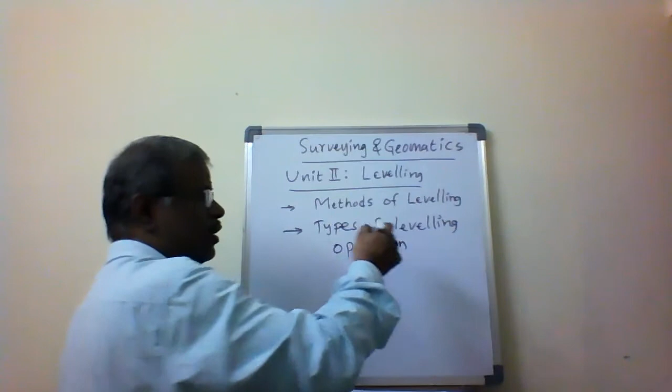Now, after understanding the level and the staff, various types of staves are available. Next is the methods of leveling and the types of leveling operation. In this session, I am going to discuss the various methods of leveling, and the types of leveling operation carried out.

From one point to another, or one end to the other, how the leveling survey is carried out, and the progress of leveling work done by different operations of leveling, is called types of leveling. Methods of leveling refers to the various methods to get the vertical elevation or vertical distance measurement, which we call methods of leveling.

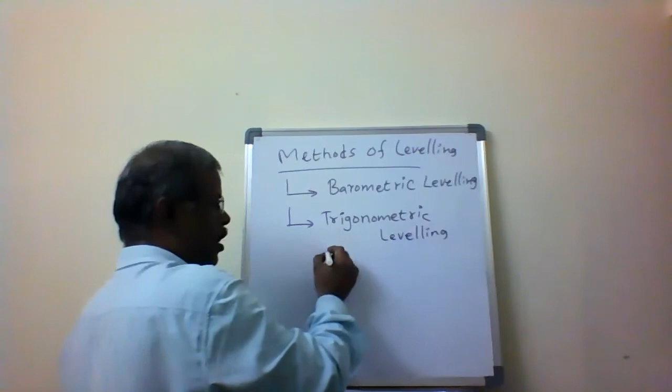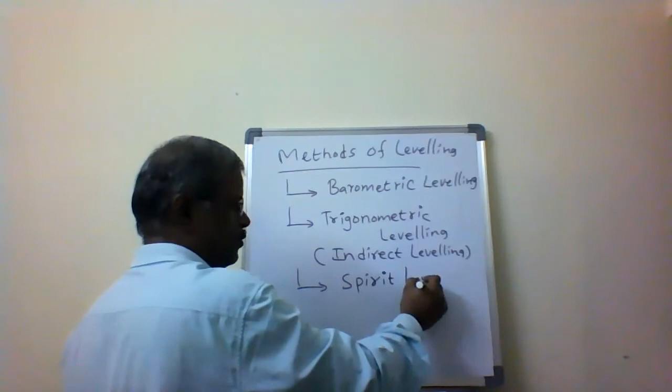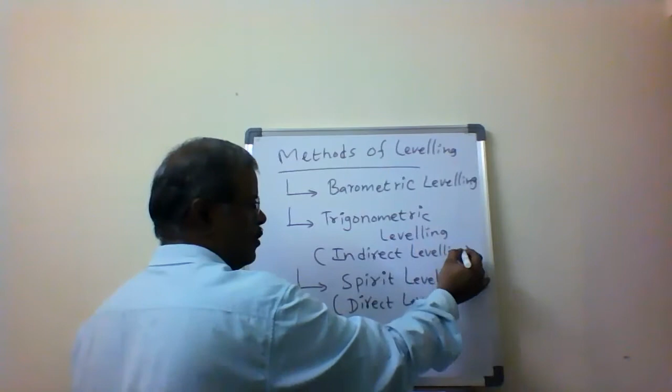In the methods of leveling, three methods are available. The first method is called barometric leveling. The second method is called trigonometric leveling, or indirect leveling. The third method is called spirit leveling, or direct leveling. These are the three methods of leveling available to carry out the leveling survey or leveling work: barometric leveling, trigonometric leveling or indirect leveling, and spirit leveling or direct leveling.

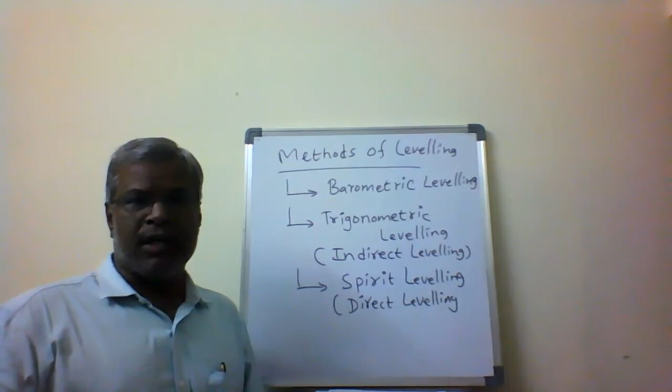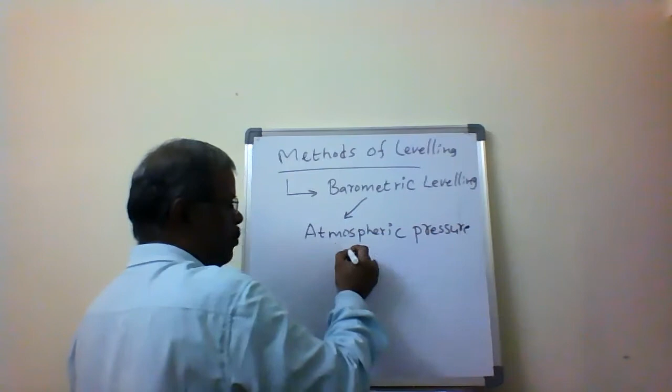So what is meant by barometric leveling, trigonometric or indirect leveling, and spirit or direct leveling? In barometric leveling, we measure the atmospheric pressure and calculate the difference of elevations based on that.

So difference of elevation, or elevations of the points. Here the principle we are going to be using is

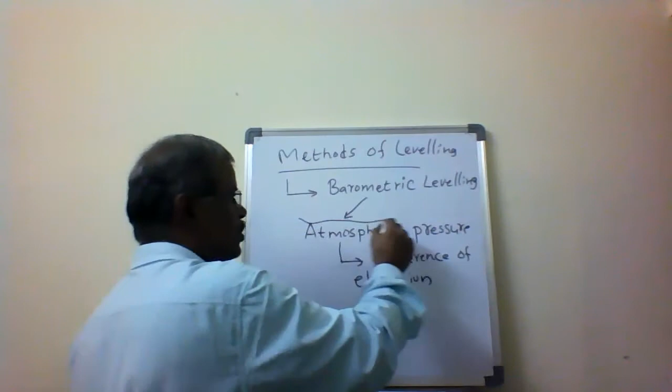atmospheric pressure. That's why we are going to call it barometric pressure and bars. Barometric pressure is going to be measured, the units are going to be called bars. So the barometric pressure is not going to be constant from place to place. So the elevation is going to be measured, so from one point to the other point, the elevation is going to change. The atmospheric pressure is not constant.

So this type of survey is going to be used for reconnaissance survey. It is not going to be suitable to carry out the entire leveling process. That's why it is least preferred while going for leveling survey, because atmospheric pressure is not constant. It is going to change from place to place and from point to point. So these abrupt changes will be there in the atmospheric pressure.

So based on the atmospheric pressure only, we are going to be doing the leveling. We call it barometric leveling. So that's the difference of elevation we are going to measure. So with barometric leveling, the changes will be more, or abrupt changes will be there.

It is going to be suitable for preliminary or reconnaissance survey, only for small data we are going to get for the reconnaissance survey, or important information we want related to the place or location. So in that circumstance, we are going to use barometric leveling.

And if you are going for extensive surveys, we are going to preferably use spirit leveling, or direct leveling. So this is about barometric leveling.

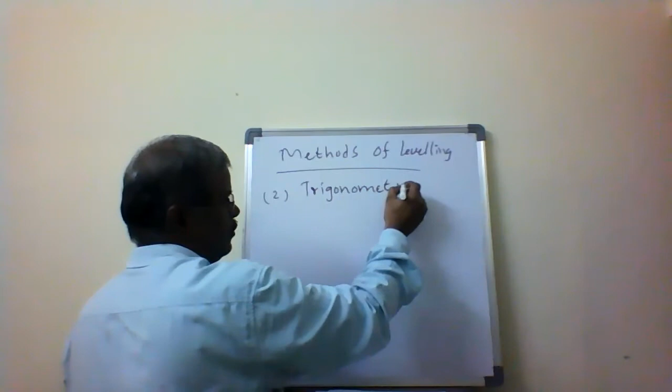So next, the second method in the methods of leveling is trigonometric leveling. So the second method is going to be classified as trigonometric leveling, or this is going to be called indirect leveling.

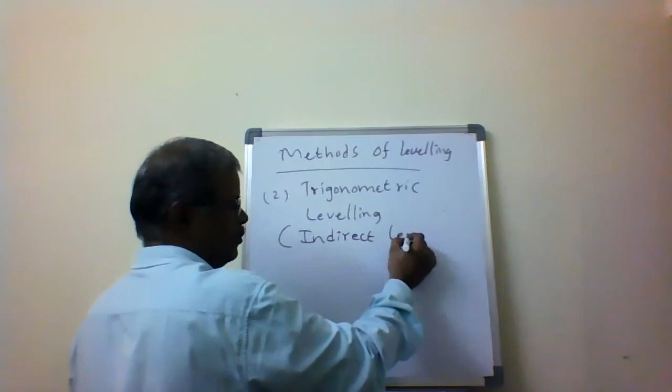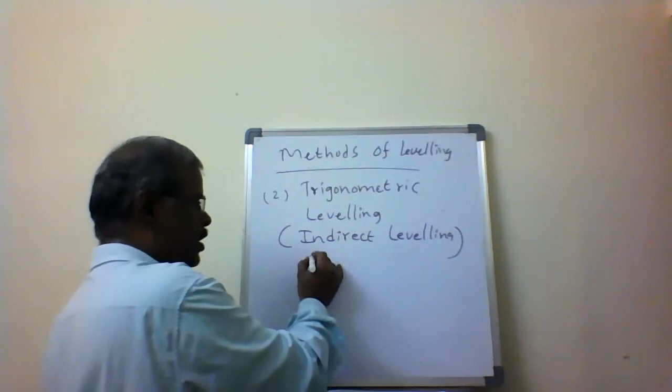So here the term itself gives you the meaning that trigonometry, the trigonometrical relations, we are going to be using while carrying out the leveling work or leveling survey. That's why we call it trigonometric leveling or indirect leveling. So what is the trigonometry we are going to be using here? We call it in terms of heights and distances.

Because the objective of leveling is that we are measuring the vertical distance, vertical height, or the elevation. So that is what we call height. And in addition to that, distance also.

So I want to get two measurements that will be given by angular measurements. If I want to measure vertical height, I need to get the angle, otherwise without the angular measurement it will be very difficult to measure or find out the height. So that's why distance, the linear measurement, is required with respect to the height.

So the one more additional requirement is going to be called angular measurements. That's why we call it indirect leveling. This is not the direct leveling process. So it will be a combination of linear measurement as well as angular measurement required.

I want to get the height or elevation, the vertical distance, vertical height, or elevation. It is going to be a combination of angular measurement and distance measurement. So with only vertical measurements in the leveling instrument, the objective of leveling is to find out the vertical height or the elevation.

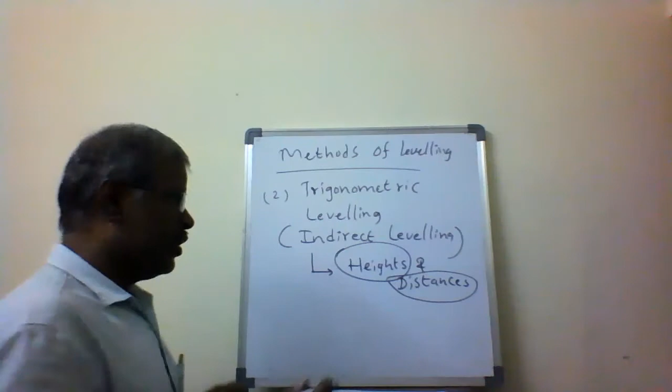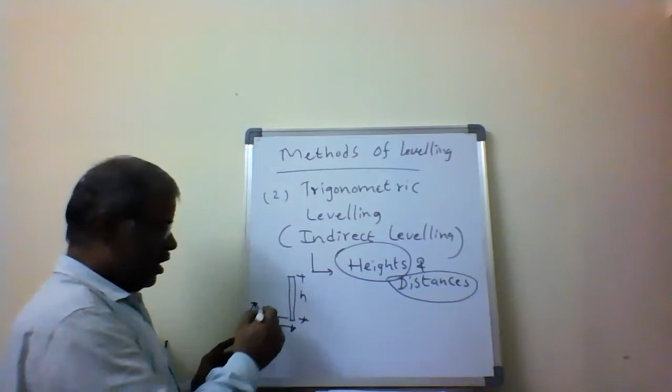For that, we require angular measurement as well as distance measurement, linear and angular. Combination of these gives us the height. So that's why it's called indirect leveling. I want to find out the height of this tower from the instrument station. So first I have to measure the distance, and then if I know the angle with respect to the horizontal, I can find out the height of elevation.

So height is measured with respect to angle and distance. Our objective in leveling is to find out the height, elevation, or vertical distance. For that, I use angular measurement as well as distance measurement, with the help of the angle and distance, applying trigonometrical principles, we calculate the height.

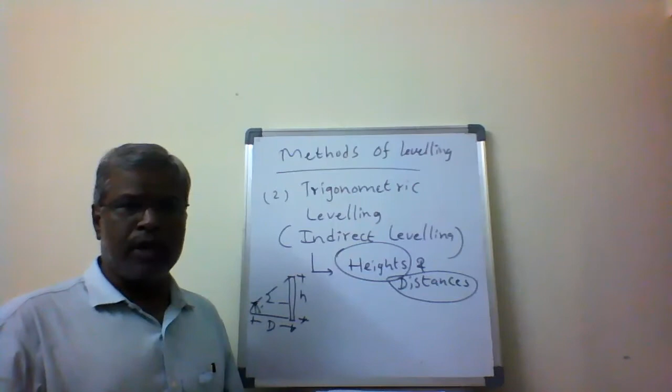So due to this, it is called the indirect method of leveling, or indirect leveling. Indirect leveling is called trigonometrical leveling. We use angular and distance measurement to estimate the vertical height or vertical distance of elevations.

Next, the last method is called spirit leveling, or direct leveling. We use the term spirit because the bubble contains mercury, that's why we call it spirit leveling.

The leveling head has a bubble, which we have to bring to the center so that the instrument is properly leveled. The dumpy level, Y level, tilting level, or automatic level — any leveling instrument has to be properly leveled using the spirit, which contains mercury, and this is called the bubble.

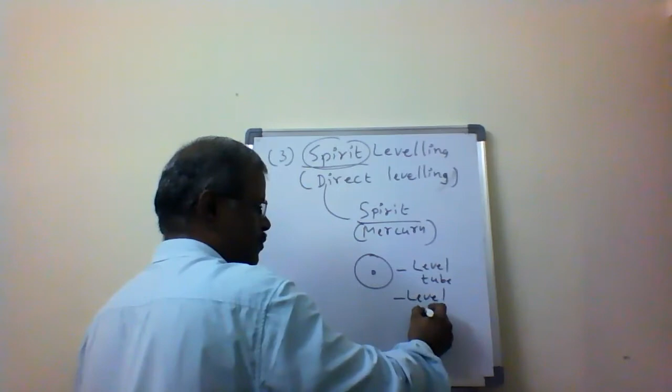This is called the level tube or level bubble. The level tube consists of the level bubble attached to the leveling head, such that the instrument is properly leveled. We have to adjust it so that the level bubble comes to the center by using the foot screws.

This is where we already discussed the temporary adjustments using the 3 foot screws. We must make sure the bubble comes to the center, then the instrument is properly leveled and the measurements taken will be correct. If the bubble is not centered and we take measurements, those will not be accurate — they will be erroneous.

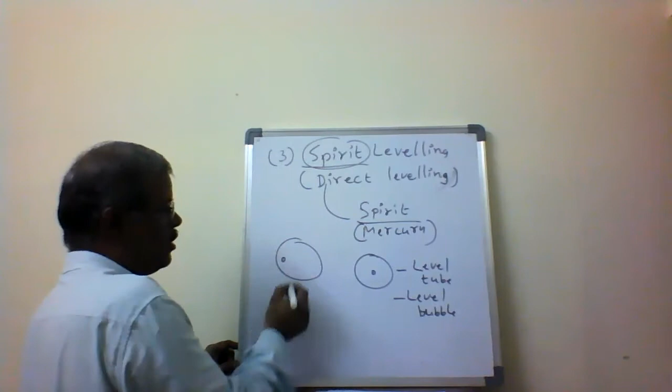So if the bubble is positioned like this, it's wrong. But it always has to come to the center of the level tube or level bubble in the circle, then the instrument is properly leveled. That's why we call it spirit leveling, or direct leveling.

Then we take the scale reading using the staff, where the crosshairs bisect the vertical scale or staff, and we take the reading. This is called the staff reading. The staff reading is added to the known elevation, and we can get the height of the elevation.

That's what we call the reduced level, where the level is reduced with respect to the known elevation of the datum line, or datum surface. So what we calculate is called the reduced level or elevation. That's why spirit leveling is also called direct leveling.

Directly we will take the vertical distance or vertical measurements with the help of a leveling instrument. The leveling instrument is controlled by the level tube or level bubble. In the level bubble, we use mercury or spirit, that's why it's called a spirit level. Always the base is the level bubble or level tube.

Once your level bubble is centered, the instrument is properly leveled. Readings taken by the leveling instrument are then correct, giving you the vertical distance, height, or elevation measurement.

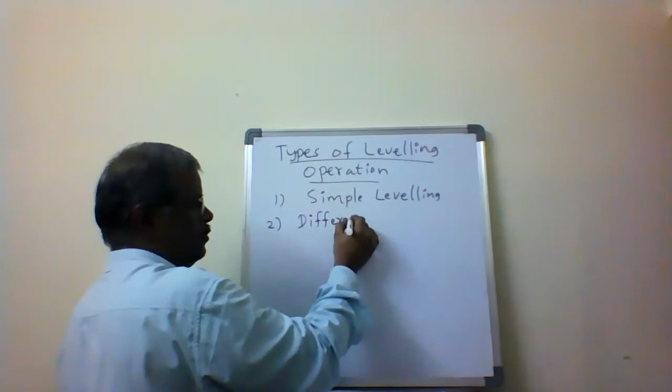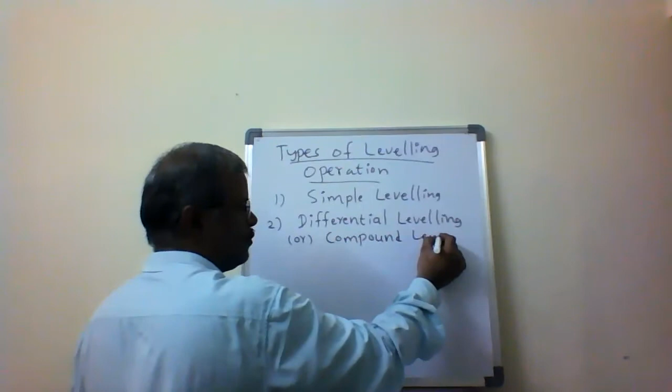The second one is differential leveling, or compound leveling, or continuous leveling.

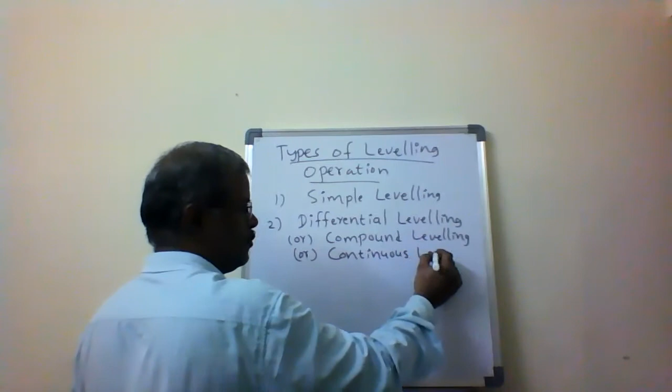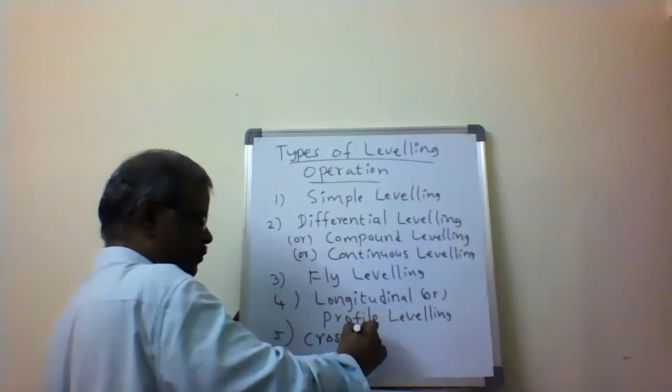The third one is called fly leveling. The fourth one is longitudinal or profile leveling. The fifth one is called cross-sectional leveling. The sixth one is called check leveling.

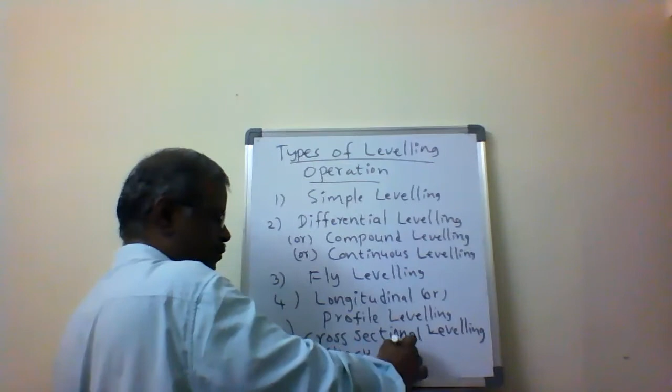So these are the six types of leveling operation. Depending upon the situation or circumstance, we use these to carry out the progress of the work. First is simple leveling, second is differential leveling or compound leveling or continuous leveling, third is fly leveling, fourth is longitudinal profile leveling, fifth is cross-sectional leveling, and sixth is check leveling.

These are called leveling operations, used to find the difference of elevation between points. Our main objective is to calculate the difference of elevation, or to find out the height of the object with respect to the datum line or datum surface. That is our objective.

So the first objective is estimating the height or elevation of the point or object with respect to the given datum. The second is the difference of elevation between two points. These are the two things we find out using the leveling operation, or leveling survey.

So what is the simple leveling operation? What is differential leveling or continuous leveling operation? What is fly leveling? Longitudinal or profile leveling, cross-section leveling, and check leveling. The first one is called simple leveling.

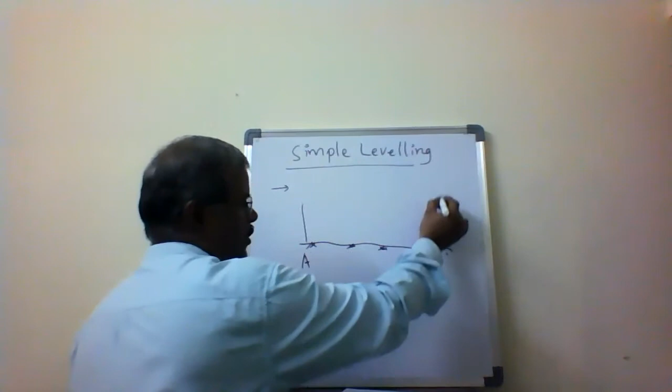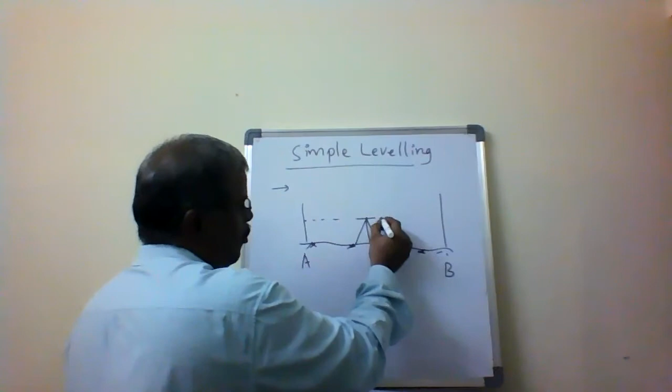So how do we carry this out? This is the ground. This is point A, and this is point B. The leveling instrument is going to be set up midway between point A and point B, because the distance between A and B is very small. That's why we select the location of the instrument midway between A and B. Then I'm going to take the readings on A and B.

After calculating that with respect to the benchmark, we are able to calculate the elevation of point A and the elevation of point B. Once you know the elevation of point A and point B, we can compare whether A is in a higher position or B is in a higher position. That is what we call difference of elevation. We calculate this once we know the elevations of point A and point B, the heights of the points. This process is called simple leveling.

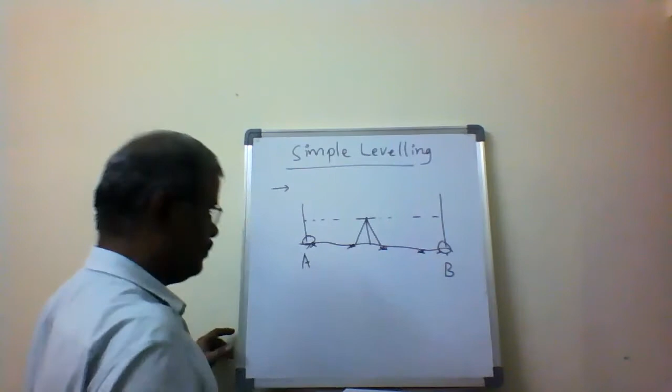So next is the second method, called differential leveling or continuous leveling, also known as compound leveling.

Here also the objective is the same: we find the elevation of the points first, and second, the difference of elevations from point A to point B. At consecutive points, we are able to find the difference of elevation. Here A and B are very far apart, so this is for longer distances. Sometimes while taking the leveling survey, an obstacle may come across.

So then shifting of the instrument will take place. We shift the instrument, go beyond the obstacle, take out measurements, and find the elevations of all the points. In such cases, we use continuous leveling or compound leveling, whereas in the previous case it was simple leveling.

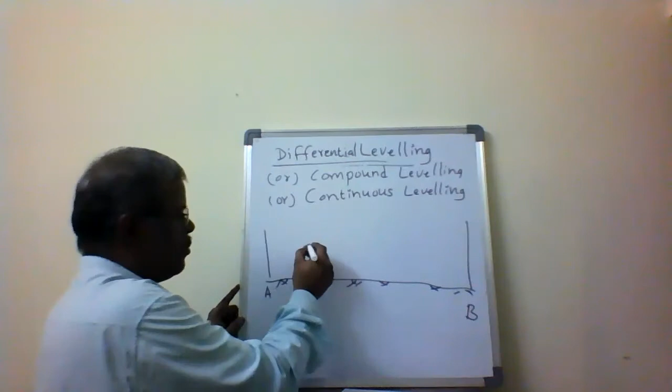So here, let's see how we carry out the process for differential leveling or compound leveling. This is point A and this is point B. The distance between A and B is very large, so I'm taking intermediate points. These are the intermediate points between A and B, which I'll label as C1, C2, C3 and C4.

Now I am going to keep the instrument over here. This is the first position, this is the second position, this is the third position, and the fourth and fifth positions.

So this is why we are going to call it the change point. C1 is the first change point, C2 is the second change point, C3 is the third change point, and C4 is the fourth change point.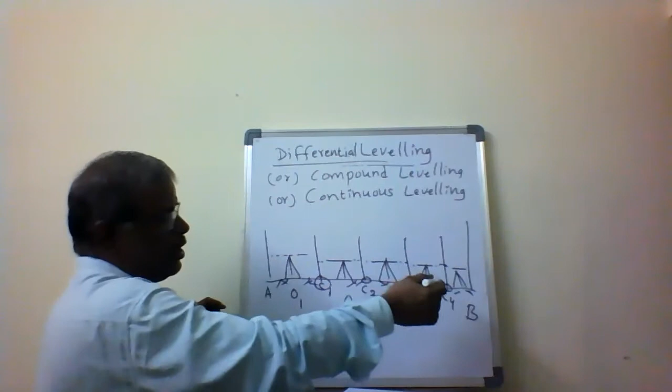From A to B, it is very difficult to get the observation or visibility of B, as the point is very far. So with one setup of the instrument, we are unable to get the data. So what I'm going to do is divide it, and the second, third, fourth and fifth setups, these steps are going to be called simple leveling. We are going to do this a number of times.

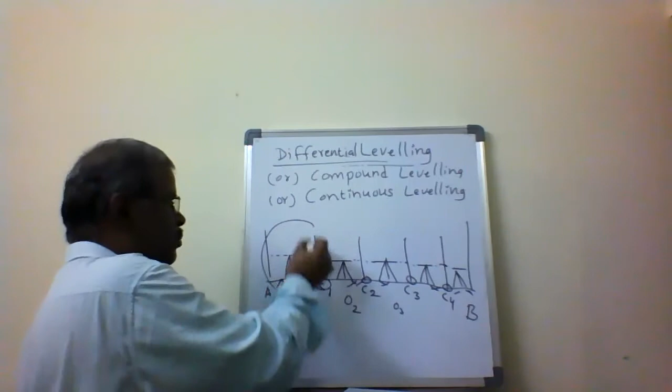Simple leveling, this is the simple leveling process. So we continue doing it next and next, four steps we do. The simple leveling operation we continue - that's why we call it continuous leveling.

Simple leveling operation is continued till we reach point B. So till the remote point B, we carry it out a number of times, and the instrument is shifted, so that we call it continuous. Since the instrument is used a number of times, we call it compound leveling.

So now the elevation of point A is known, and the elevation of point B is known. From that we are able to calculate the difference of elevation, so which point will be at a higher location and which at a lower position. This process we call differential leveling.

This process is laborious because it consumes time. Each and every time we shift the instrument, we have to apply the temporary adjustments - centering, leveling, and focusing. Each operation we complete, then the instrument is ready, and then we take the reading. So that's why it is called a laborious process when doing continuous or differential leveling.

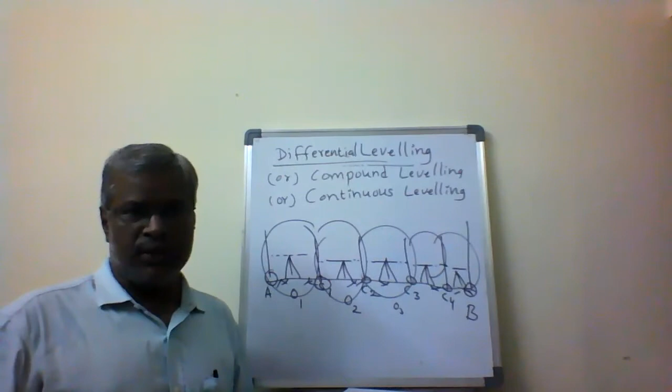Simple leveling is the simple process for finding out the elevation and the difference of elevation of the points.

So then the third method we call fly leveling. Fly leveling is used where there is only a backsight reading and a foresight reading - there is no intermediate sight reading.

We already discussed that backsight reading is the first reading taken after setting up of the instrument, and foresight reading is the last reading we take, we call it foresight reading. And one more is called intermediate sight.

So if I keep the instrument over here, this is my first point, this is my last point. So then I'm going to bisect the point. First point I'm taking the reading - this is my second point, third point, fourth point, and this is the last point, B, A.

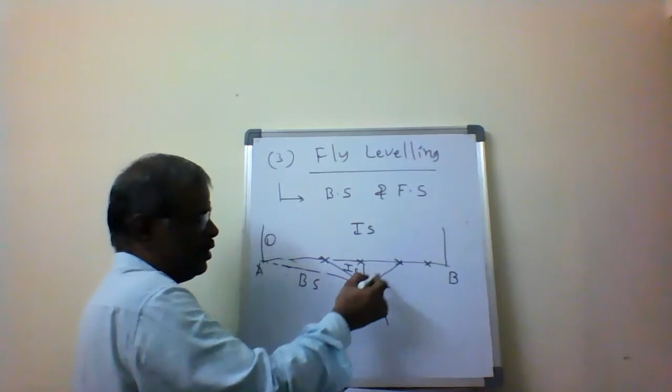So whatever reading we take after centering and leveling is completed, the first reading taken on point A is called the backsight reading. Then this is intermediate sight, this is intermediate sight, this is intermediate sight, and the last one is called the foresight.

Foresight reading is the reading taken before shifting of the instrument - we call it foresight reading. So in between backsight and foresight, whatever readings we measure, we call those intermediate sight readings. That's the meaning of the name - intermediate sight reading is in between backsight reading and foresight reading within one setup of the instrument.

This is the first setup of the instrument. Once we take the foresight reading, it means we shift the instrument, since visibility of the object is not possible further. That's why we shift to the next position - shifting of the instrument to the next position. So then where we end is point B, where we take the foresight reading.

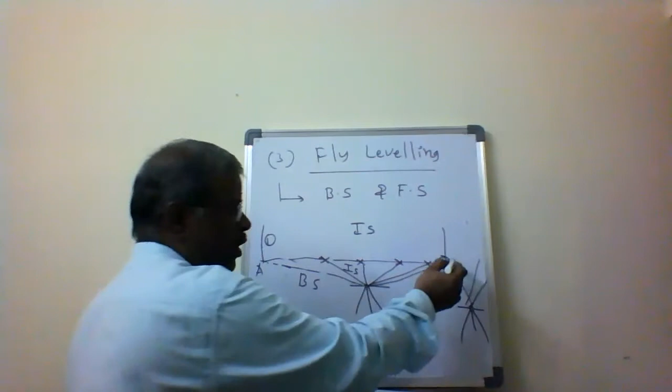So once again we are going to take the instrument to the second position, where we completed point B. Then we are going to take the reading on the back. The first reading will always be the backsight reading, then it continues. This point we call the change point. The change point will have the previous setup's foresight reading, and the next setup's backsight reading. That's why it's called the change point, because we are changing the instrument. Then we take the reading on the same point as the backsight reading, and continue the progress of the work.

So the first reading will always be a backsight reading, and the last reading will be a foresight reading. In between the backsight and foresight reading, whatever readings we take with the leveling instrument in one setup, we call intermediate sight reading. This is the nomenclature we use for backsight, foresight, and intermediate sight. In simple leveling, we can have any number of intermediate sights with respect to the backsight and foresight reading.

Similarly, in continuous leveling, more intermediate sights will come when comparing with simple leveling. In continuous leveling, the more times we shift the instrument, the more intermediate sights will come with respect to the backsight and foresight reading.

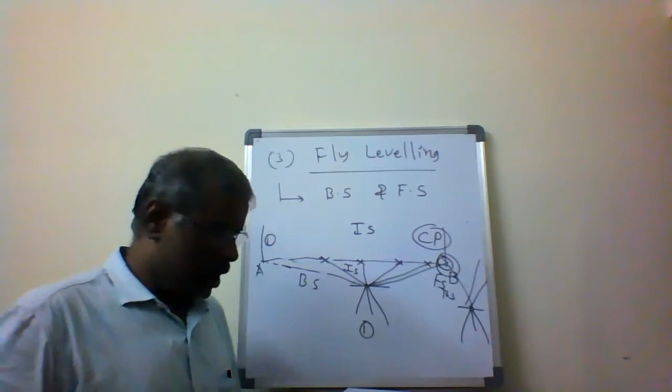But in the case of fly leveling, we have to complete the progress of the work very fast. That's why we are going to take only backsight reading and foresight reading - there is no intermediate sight. So we take the instrument here, and I'm going to take the backsight reading. Here is the position of the instrument - backsight reading and foresight reading.

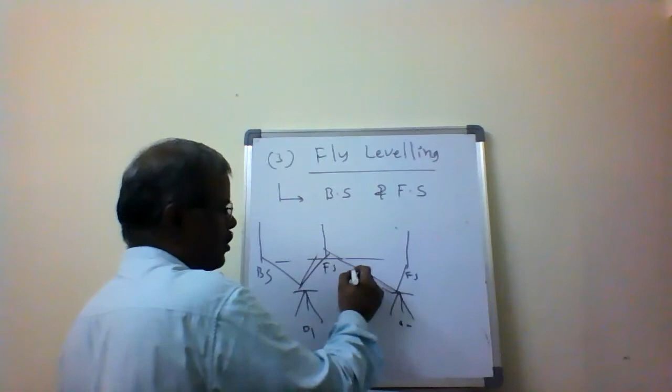Then I'm going to shift the instrument. So this is O1, this is O2, where we are taking the foresight. Backsight reading I am taking, then one more reading as foresight. Here backsight and foresight - this is change point 1. Then change point 2 - the next setup of the instrument, taking the backsight, and next the foresight. So the process of leveling continues. With backsight and foresight, there is no intermediate sight - only one reading we are taking.

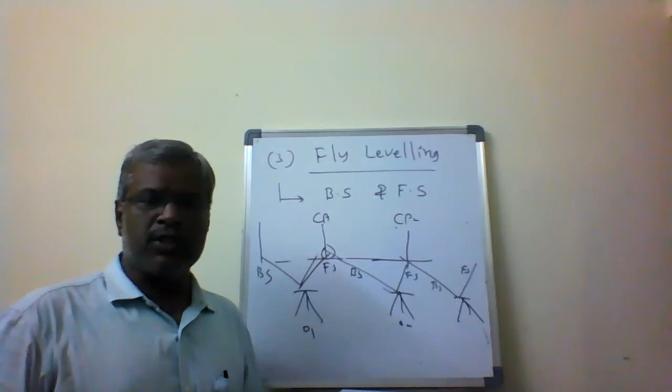So however far the telescope can see the object, that far in that direction we directly take the foresight. Then we shift the instrument and carry it over again. This way we are going to be fast, finding out the elevations in a faster way, and establishing the benchmark. That is the purpose of using fly leveling. Fly leveling - the term itself gives the meaning of flying from one place to another place.

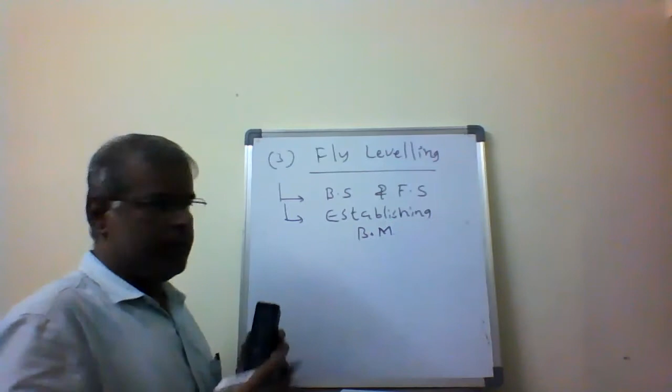It will be a combination of backsight and foresight reading, and the other main purpose is establishing the benchmark. For that purpose, because the starting of the work has to take place from here, I want to establish the benchmark. So what I'm going to do is - from here, the permanent benchmark is available somewhere else. From here, I have to shift it to where my work is going to start.

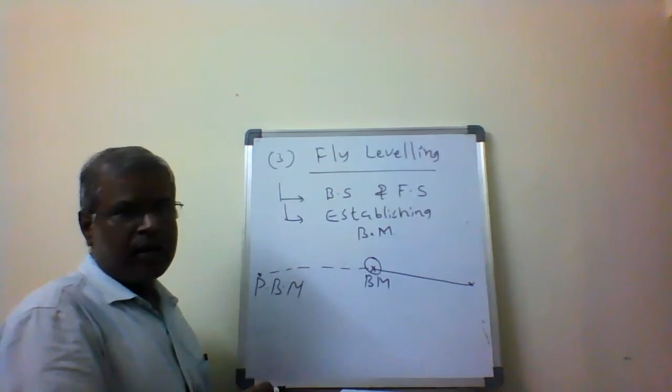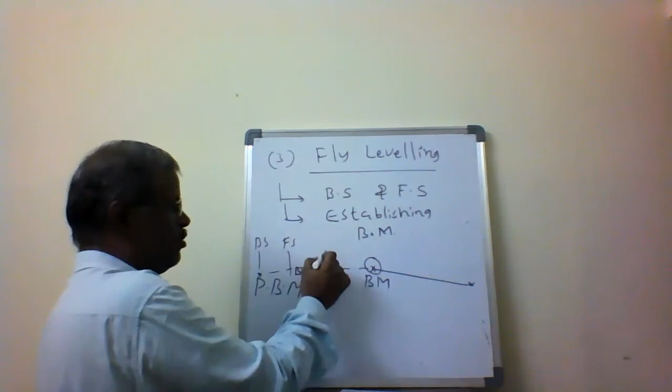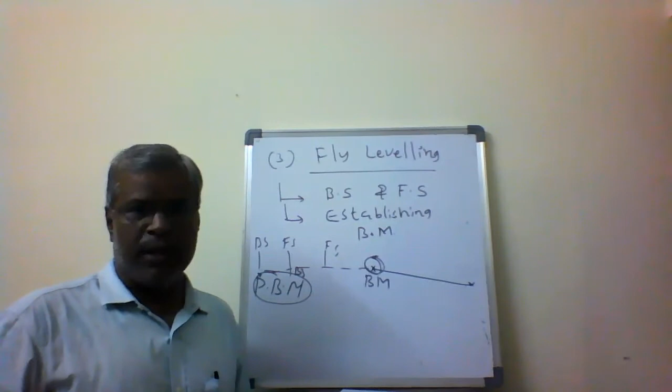So here we take backsight, foresight, again backsight, foresight, and so on. This benchmark is going to be shifted over here, establishing the benchmark at the site where we require it. That's why we call it fly leveling - using the operation with backsight and foresight, and the main objective is establishing the benchmark. This is one type of leveling operation used for establishing the benchmark, combining backsight and foresight reading. In simple leveling and continuous leveling, we use intermediate sights also, but here there is no intermediate sight - exclusively backsight and foresight.

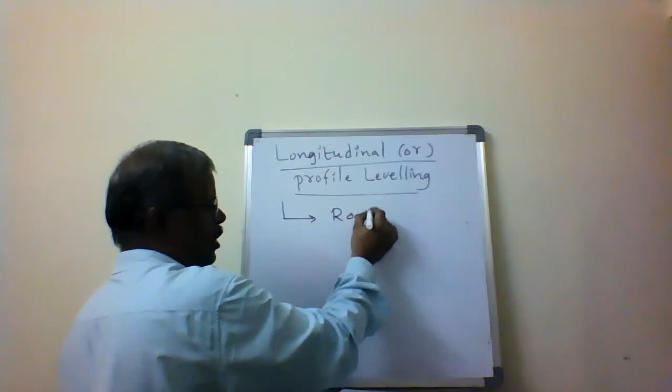The fourth method is going to be called longitudinal or profile leveling. This is mainly used for road construction and railway track construction.

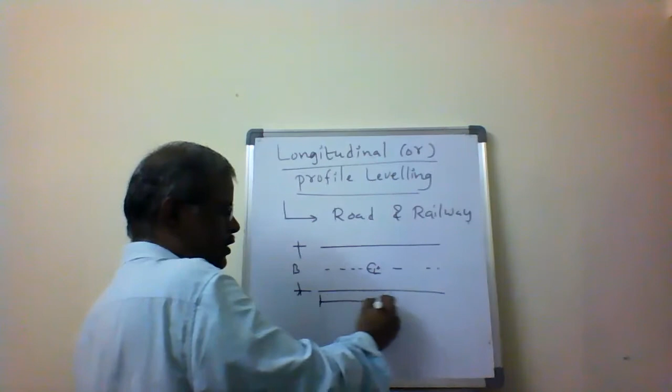Profile means we need to know the elevations of the points along the center line of the alignment. If you take a road, this is the center line of the road, of the alignment. This is the width of the road, and the length of the road is going to be infinite.

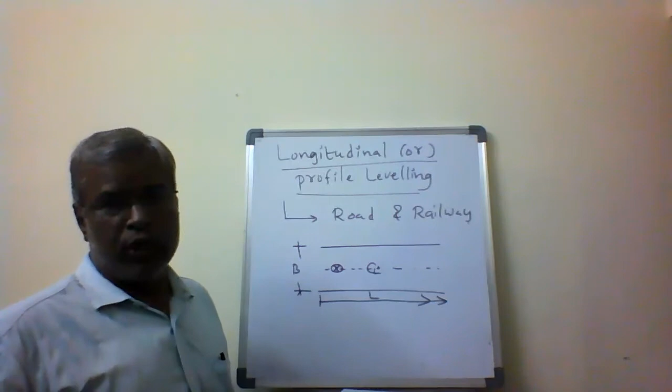Now I want to know the profile of the ground along the center line. Why do we require the profile of the ground along the center line? It means we need to know how much the surface has to be leveled, how much has to be excavated, how much has to be filled.

If you take the elevation, it will look like this. This drawing is the plan of a road, and in elevation it looks like this. So then I have to make a road like this. This portion comes under filling, and if the ground comes across like this, it is called excavation. So the profile of the ground will look like this.

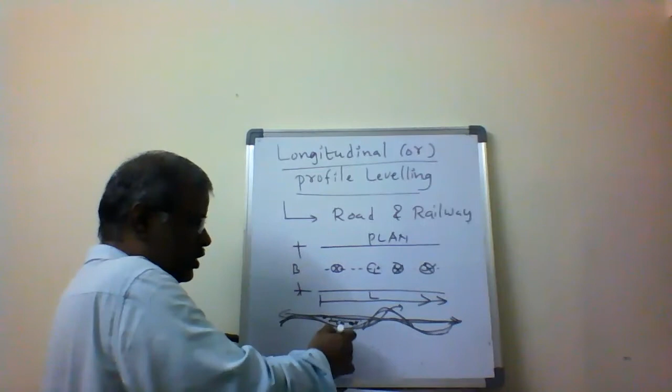For that, we take the levels or elevations of the points. Then if you plot that, we get the profile of the ground. Then we have to estimate the earthwork excavation, where I have to excavate, where I have to do the filling. This is fixing up the level of the road. So this much comes under the filling portion, and this comes under the excavation portion.

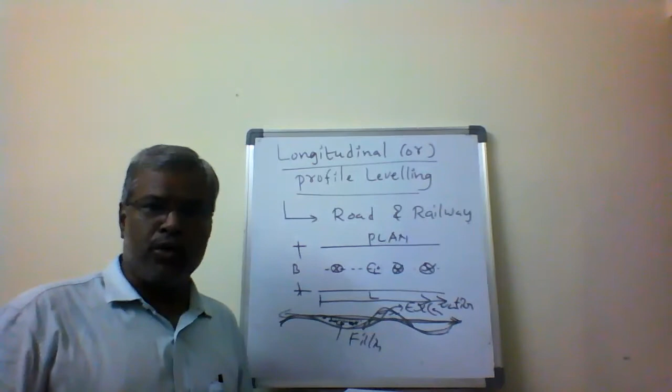So how much volume of earth has to be excavated, and how much volume of earthwork has to be filled, is estimated with the help of longitudinal or profile leveling, by taking those levels. This same principle is used for the railway track also. This is the plan of a road, and this is the center line.

So the instrument will be kept somewhere, and I'm going to take the staff over here, then take the readings so that the elevations of the points will be known. This means we can see how the terrain or profile or surface will be, and more undulations will be there. So then we have to take an interval, known as the chainage interval. We have to take it very near.

Successive intervals will be taken when the ground is flat, so the chainage interval has to be longer when the profile is flat, and shorter when there are more undulations. Points are taken very near each other, and we estimate the elevations of the points. After that, we can find out where we have to excavate and where we have to fill. That's why we call this profile leveling.

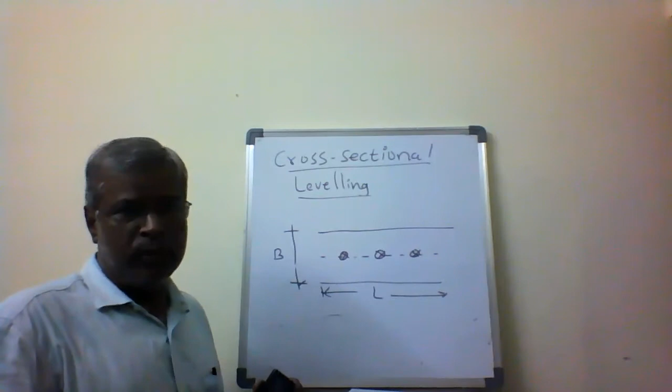If you take a road along the center line, we want to know the profile of the ground. This is along the length direction, so we call it longitudinal leveling or profile leveling. Now, if I want to construct a road, I also want to know the profile of the road in the transverse or width direction. So the width of the road also needs to be estimated for how the ground profile will be. I run points with respect to the center line in the transverse direction and take levels there.

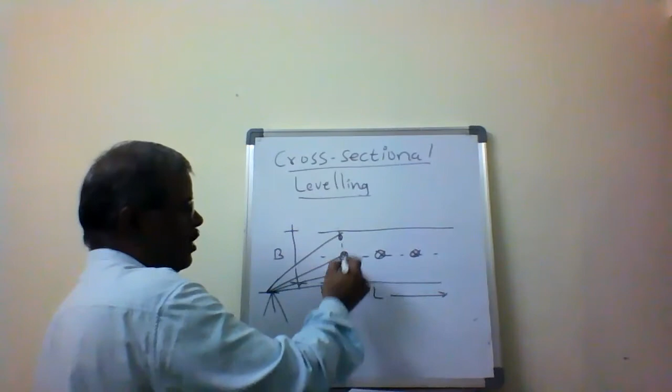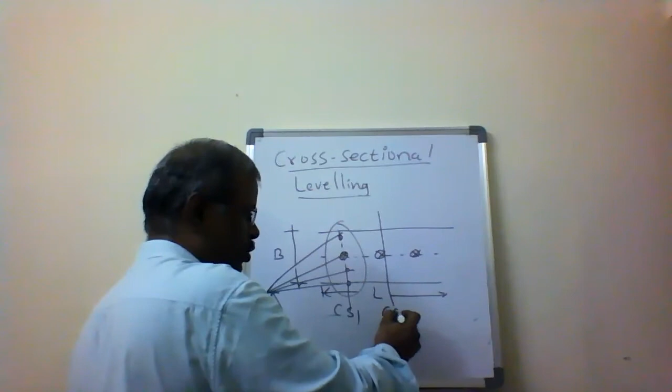My leveling instrument will be set up, and I take suitable points in the widthwise direction, taking readings to get the elevations of the points. Then I plot the cross section - this one I call cross section 1. Similarly, I take cross section 2, cross section 3, and so on in the widthwise direction, finding the elevations of the points and plotting the profile of the ground along the width direction to determine how the surface should be leveled.

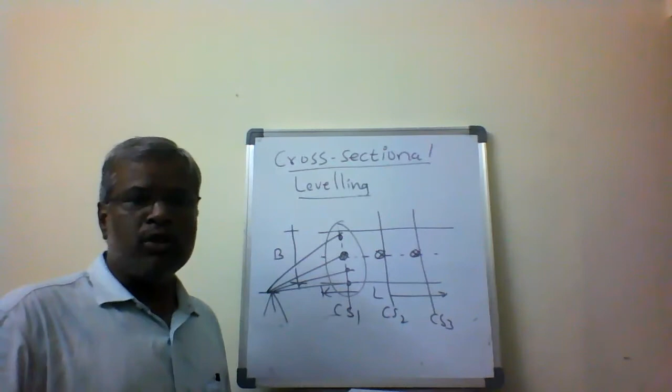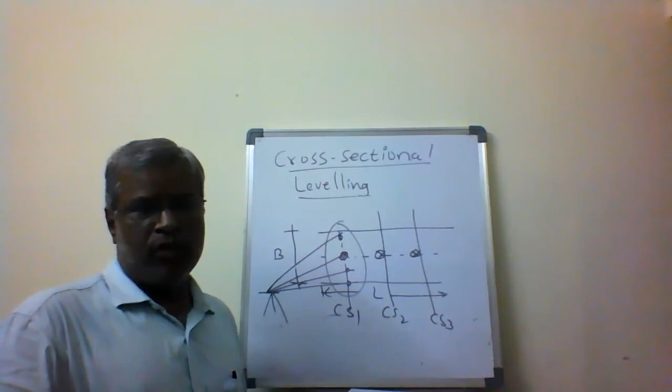That is the main objective carried out using cross-section leveling, which is why it's named cross-section leveling - for the widthwise direction of a road or railway track. The main objective is to know the ground profile and how to level the surface, both lengthwise and widthwise, since a road has both length and width. From the ground profile in both directions, we determine where to fill and where to cut - this is the earthwork excavation and filling estimated using longitudinal or profile leveling. The second type is cross-sectional leveling.

Then the last one is called check leveling.

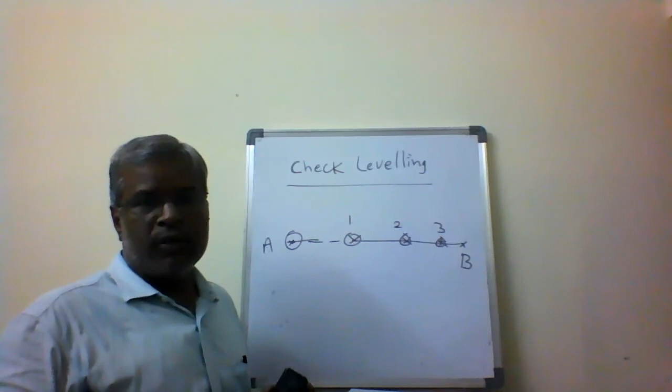So whether we calculated correctly or not, whether the elevation of the points is correct or not - that we are going to be checking in the reverse direction. That's why we call it check leveling. So we always start from A and reach the destination point B. Now from the destination point B, we start and reach back to point A, and we compare with the previously calculated elevations from A to B - the same elevations have to coincide.

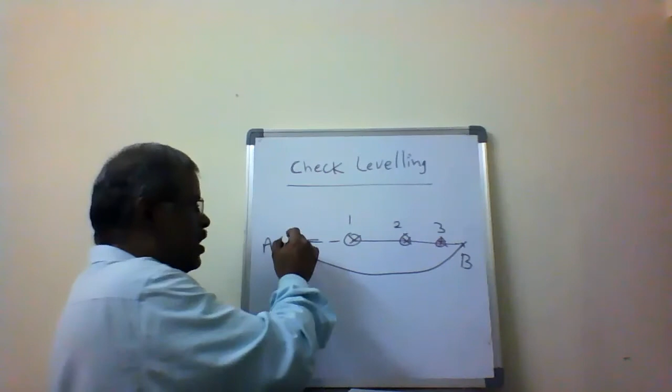So what is the elevation of A, while doing it in the other direction, and reaching back to point A - that's why we call it the check leveling process. So if the value of A coincides, then whatever elevations we calculated for the points are correct.

Otherwise, we have to redo the process and once again estimate the elevations of the points. So in that way, check leveling is used to check the accuracy of the work. For that purpose, we apply check leveling in the reverse direction, estimating the elevations of the points. Once it coincides, the leveling work is correct or accurate. If it doesn't match with the previous results or previous elevations of the points, then we conclude that the estimation of the points is wrong.

So then we have to redo the work, or repeat the process of the work by once again taking the measurements of the points and estimating them. This means checking the accuracy of the work is done by check leveling.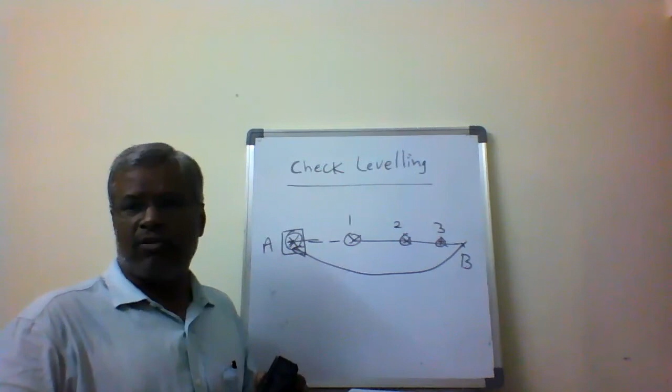So this is about today's session - we discussed the methods of leveling and the types of leveling operations. In methods of leveling, barometric leveling, trigonometric leveling, and spirit leveling are direct leveling - actually trigonometric leveling is indirect leveling, and spirit leveling is direct leveling. In the types of leveling operations, we discussed simple leveling, compound leveling, continuous or differential leveling, fly leveling, longitudinal or profile leveling, cross-section leveling, and check leveling.

After understanding the methods of leveling as well as the types of leveling operations, we have completed the basic concepts. Next we will go through the different methods available to calculate the elevations of points, or to calculate reduced levels with respect to the readings taken in the field. We always take readings in the field with respect to the staff reading, but that staff reading does not directly give the elevation. So with respect to a benchmark, reference point, or known elevation, we estimate what we call reduction of levels - reducing the levels with respect to the benchmark to estimate the elevations of the points.